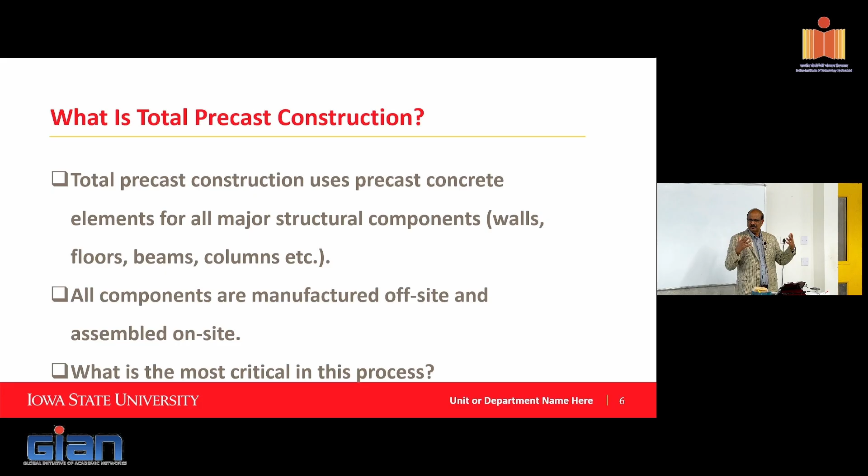Now you have to bring them onto the site, and remember that those two pieces are going to be lifted as simply supported pieces. But you didn't design them to be simply supported. You have a long, big piece. The stresses the beam is going to see are going to be very different after you cut it into pieces. Once you bring it to the site, you're going to connect the pieces together. So the connection has to be strong enough so that it acts as the long beam that you designed. So you get the feel for how these things have to come together.

So you design the entire structure. When the structure is exposed to a set of loads, wind loads, live loads and gravity loads, the entire structure has to resist those loads. That's what you start the design with, right? You have an entire structure that you're designing for. But now these pieces have to work together. They should be connected sufficiently so that it acts as a structure. That's where the connection becomes so important.

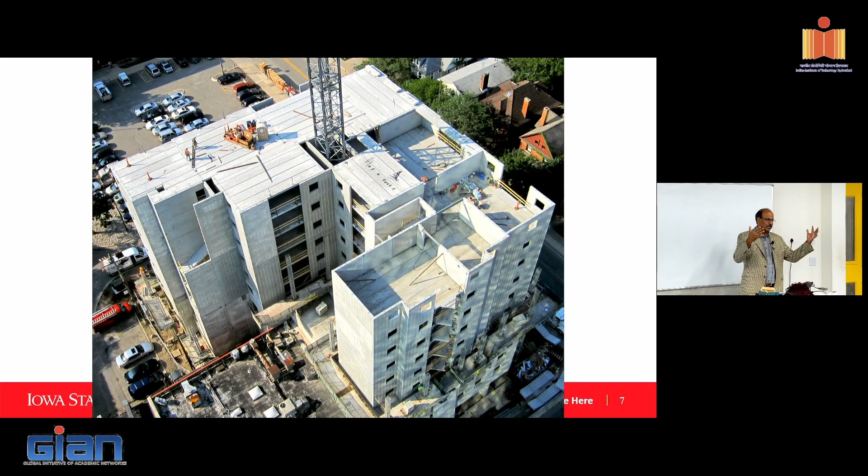And in these particular buildings, they use hollow core floor planks as well as the wall panels to ensure some sound resistance. That was a requirement. So somebody comes and says, I want to design this, we have machinery that's going to be making noise. This would be an ideal structure to use.

The hollow core panels will also support sound as a sound barrier. So you can see how they would be thinking of bringing this structure together. So you don't want to just go and start designing. If somebody wanted a structure of this, you need to have that expectation in terms of what they're looking for.

And if you are thinking of precast structures, then you want to choose the elements to do that. So if you don't have a lot of openings, like you have an apartment building with a lot of windows and things like that, it's very common to see wall structures or wall panels get integrated into the precast structures because they are pretty cost effective in terms of resisting loads as well as providing some other functional needs as well.

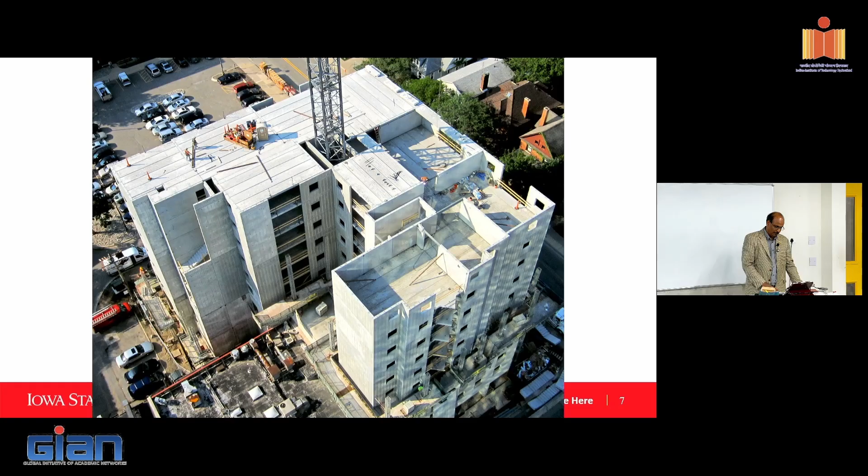So there's a historical perspective. The precast industry is not very old. The first ever precast structure was built in 1950 in the US. It was a bridge that was built. They tried this as a prefabrication because there were a few people who were keen on pushing this idea of doing things off-site and then assembling it on-site. Those few people felt so good after the construction and the success of the story, they thought they should just come together and share their ideas and build a movement behind this prefabrication concept.

And that's how the precast industry actually started in the US. It's not that a lot of companies came together. It's like a handful of engineers felt so good about what they have achieved. They thought we should create some design guidance and put different ideas together. So they sat around the table and said, maybe we should try this. And so that's how they started, and then started publishing what they call some handbook ideas, where they will put some ideas and say, okay, everybody should use this idea. And I'll get into why they went that direction.

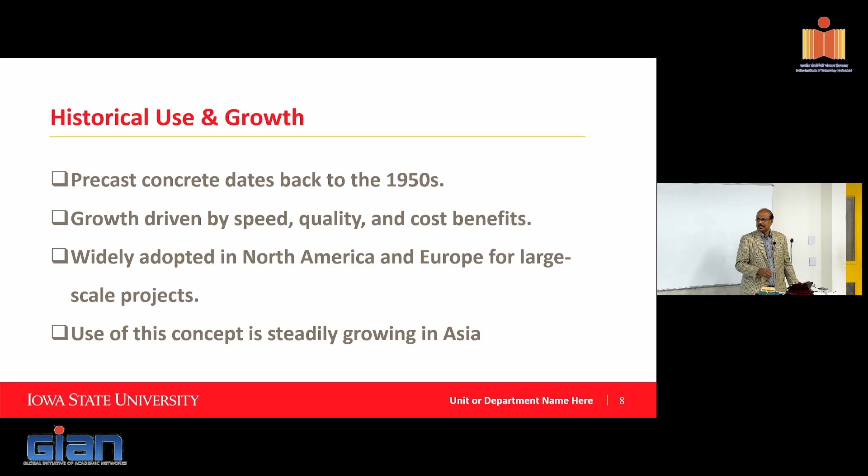So I just don't want to paint a rosy picture about precast concrete. Just like any other technology or material, precast also has its own challenges and limitations. The first thing is the transportation and handling logistics. We talked about that, right? So every piece has to be transported, as well as handled. So when I say handling logistics, it's in terms of understanding how you transport each piece from fabrication to the job site.

You will find some design flexibility limitations because you're breaking them into pieces. So for example, under seismic provisions, you're expected to have members with sufficient ductility. So if you're going to connect pieces, will that affect the performance? If so, how do you tackle that? Or should I not use that one? So precast is not widely used in seismic regions, but there is some small growth in that space as well.

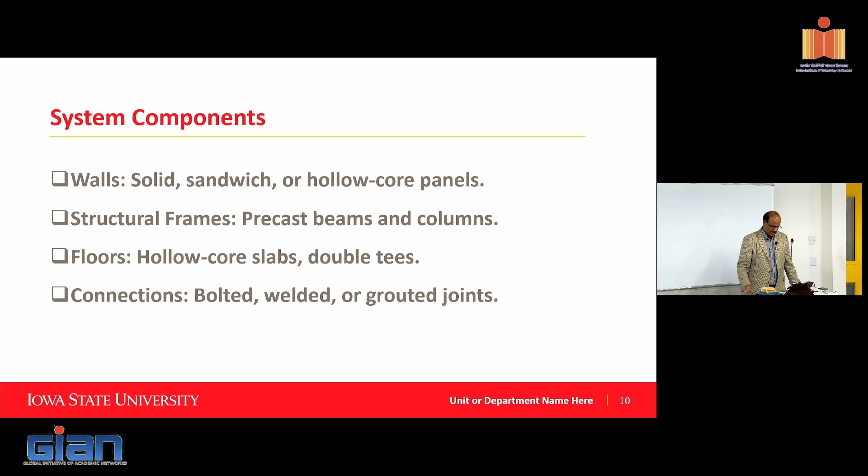The logistics part will come into play. So this is the role of the erector, and they will schedule everything as to which day the component has to show up to the site. And if they don't provide the components on site by certain dates, they get penalized. So everybody kind of works towards making this happen in a timely fashion. I mean, they could assemble a building like a 5-story within like 3-4 days once the foundation is done. They move pretty fast once they get things going.

So I mentioned that the precast will go through a 24-hour cycle. So you could see what goes on in that 24-hour cycle. So I kind of talk about the entire manufacturing process. Here you have the design and engineering work done first, right? Then the mold is prepared, reinforcement is placed. So typically they will assemble the reinforcement. They will have different crews doing different things. One crew will be preparing the mold. One crew will be assembling the reinforcement. Then the reinforcement gets put in place.

I think Satya Seelan is supposed to talk this afternoon. Maybe he'll show some of the process that they go through here.

And then they will cast the concrete. So typically, at least in the US, anywhere from 12 to 2, they would cast the concrete. That's the sweet spot to complete the construction. So that's the window they have, and everybody works towards that time slot. After 2 o'clock, one crew will leave, the other crew will come, and sometimes they will put a wet burlap or sack on, if needed. Then they will set it up so that they will do a steam curing overnight.

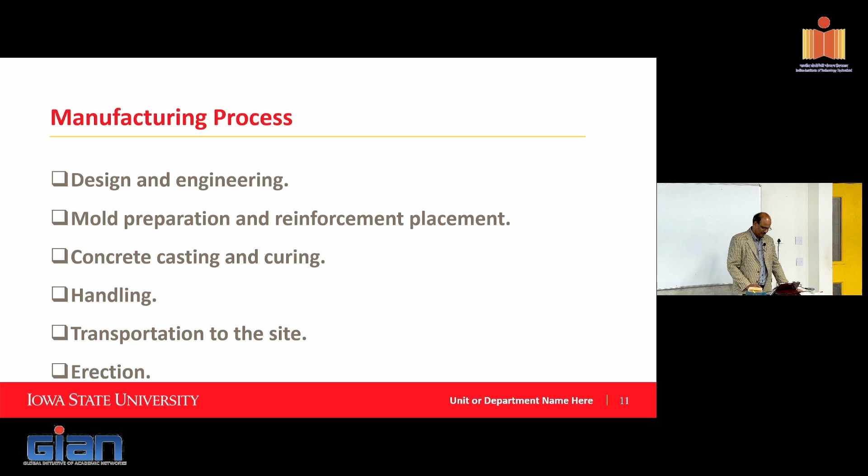So those things also had to be designed and checked to make sure that the wind doesn't blow and the building comes down kind of thing, right? It has to sustain some loads during the construction as well. Any questions? Yeah. The major constraint of adopting precast, especially in city areas, is the lack of accessibility for erecting. Accessibility for erection. Okay. Erection is a big issue, especially in the city areas.

Okay. So one of the things in the US is that not all, but some precasters would have a crew doing the erection, but most of them actually have a separate company that will do the erection, and they design, they specialize, and you give them any challenges, they will make it happen because that's what they specialize in, right? And sometimes they get involved and say, okay, that's too big of a piece. You give it to us in 2 pieces and design a connection. So yeah, especially when you have existing structures, like strengthening type of things, they go through those things quite a bit.

Any other questions, comments? Because another reason why the UHPC and lightweight concrete is picking up traction here is, as you know, the boom height, the weight that you can lift is also lower. Limitations. So that's another reason why the precasters are really looking at lightweight concrete. Oh, I see. The crane demand is also very high. You don't find cranes, and finding crane operators is very difficult. Oh, I see. Yeah.

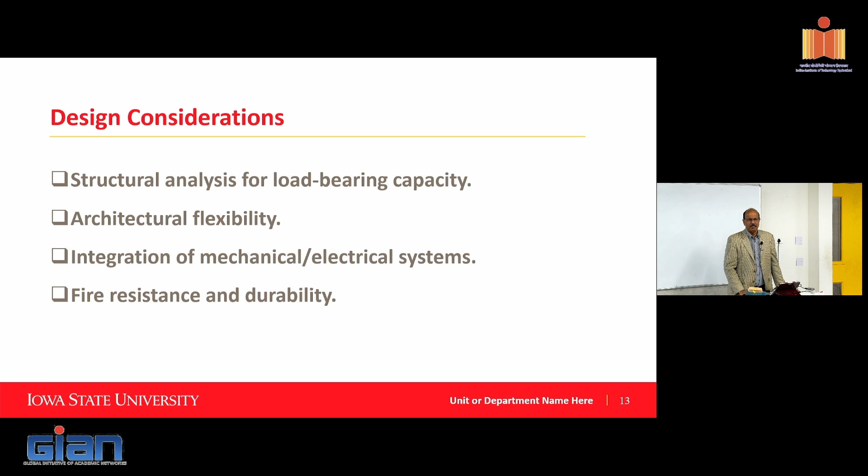Fire resistance, hopefully you will hear more about it, is a key piece that precasters try to take advantage of. They believe that they can provide better fire resistance than, say, steel structures. And if you want any fire coating or specialized provisions, they can actually integrate them as well. On the durability side, one of the reasons precast gets used is it provides better quality. They minimize water leakage and things like that, so it prevents unnecessary maintenance. They maintain the structures pretty well over time.

On the structural performance side, high strength and durability. The durability is a key piece here. Strength-wise, and I'll talk a little more on the next set of slides, they use higher strength concrete, and the strands are very high strength. With rebar, they're now pushing towards higher strength rebar, because anytime they can put less reinforcement, it cuts down the labor, which translates to savings. So they look at every step of the way.

The consistent quality is due to controlled manufacturing. These members are produced under a controlled environment; as I said, they use a steel bed and steel formwork. They use thermal curing. So if they're producing like 40 pieces, they can make sure the quality of each and every product is the same. They can crank the temperature if it's a cold day and continue to improve the performance as well. They have done a lot of work in recent years to show that it can provide better seismic as well as fire resistance. Those are probably two areas where PCI is continuing to invest more.

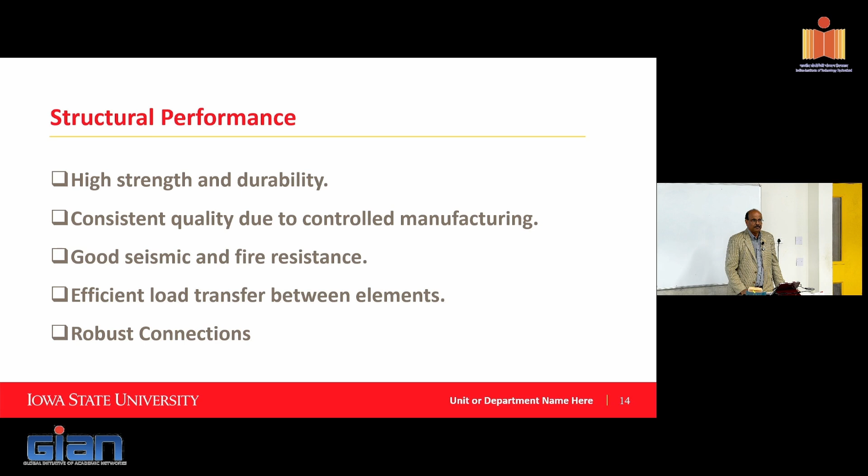Efficient load transfer between elements. This again comes down to how you connect the column to the floor. In the cast-in-place world, we typically run the reinforcement, but precast opens up a lot more opportunity, especially with the research that has happened in the last 20 years. I mentioned connections; we'll spend more time on that as well.

So construction sequence. As a designer, you probably are familiar with how you do the structural design. You figure out the load on the structure, then the loads on individual members, and you design the reinforcement and the dimensions. Obviously, when you build, it goes from the ground up, right? So the construction sequence has to address the site preparation and foundation. Very rarely do they use precast foundations. Sometimes they do, but typically they're cast in place.

Once the schedule for the foundation construction is set, the delivery of precast elements will be scheduled. Crane erection and the assembly sequence will be scheduled as well. Everything has to be done in a manner that nobody in the critical path causes any delays. They don't wait for somebody else to ship some piece, or a piece missing. They don't start the project until they get an okay from the foreman of each plant, especially if they're working with multiple precast plants. The joint finishing, as I mentioned, if finishing like grouting is required, that happens at the end.

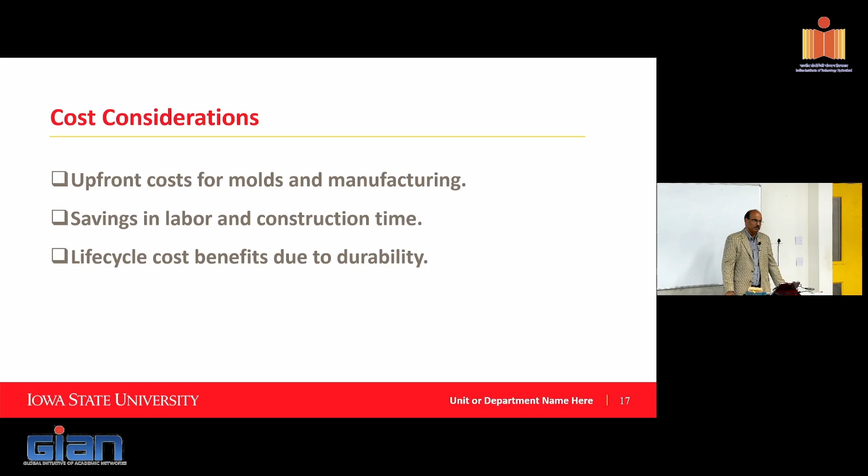Yeah, so briefly, the cost issue, we talked about that, right? There's an upfront cost, but definitely saving in labor and construction time. And one of the things that the US has also not done well, but they are spending more and more effort on, is to bring life cycle cost analysis into the structural evaluation so that they can promote precast fabrication. I don't know how much the life cycle cost is given consideration here. No. Yeah, so that's a big piece. The UHPC world is also kind of struggling because life cycle cost is not given that much consideration. But industry is putting a lot of effort in terms of making that happen.

I've got like 2 or 3 slides and then I want to give you some examples. Why don't we take a break now? Yeah, we can take 10 minutes. Okay.

So I've got one question. Sure, yeah. You mentioned this Precast Concrete Association, the professional association. Do they sell designs for design standardization? So what they have done up until now is they put out a design handbook, which I'll talk about in the next section. But in the last 5 years or so, they felt like, so the building design in the US is controlled by the American Concrete Institute, ACI 318, right? So the precast industry said, why can't we just establish our design and put it out for precast, which ACI didn't like, because, for example, prestressed concrete is covered in ACI. So there was a little bit of a political war for a few months.

Finally, ACI convinced PCI to come and work with them, and they will produce design standards, one for cast-in-place concrete, one for precast. Then we also have the Post-Tensioning Institute in the US, PTI. They said, well, why are you leaving us out? So now they have a document on post-tensioning as well. So 318 has now been replaced with 318, 319, and 320. The first version is out now in 2025. So you can get 319 and 318. There are still a few issues here and there. But they're going to promote all three now.

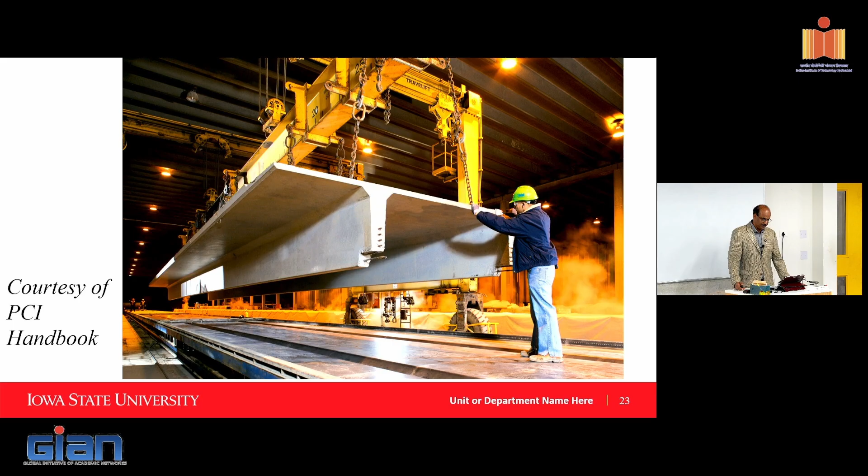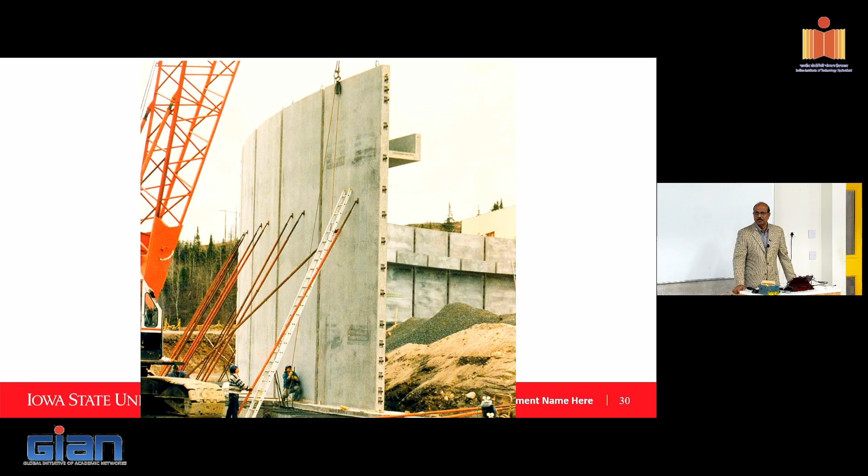And they have high strength as well. So they can pass through bundles of them. I think your homework assignment yesterday, you included 8, I believe, strands. I've seen as much as 30, 50, 60 strands that they can pass through and apply post-tensioning.